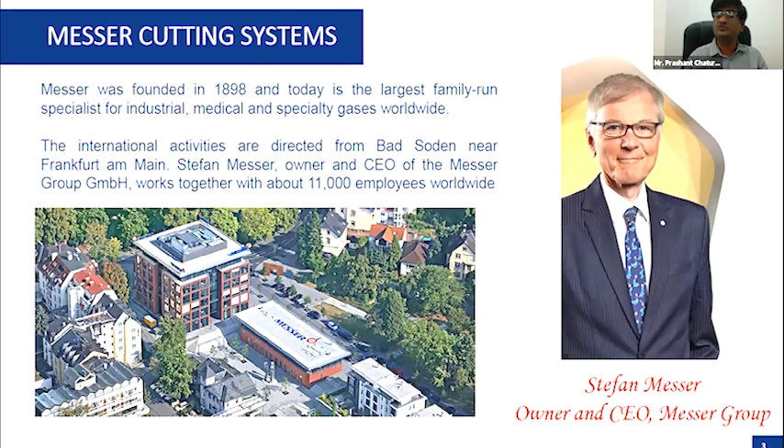So much of the business, almost 60% of the revenue of Messer Cutting Systems, comes from different industrial gases. They have different divisions, right from Spectron, which is a specialty gas equipment company, Messer Cutting Systems, which is primarily Oxy Fuel, plasma and laser cutting equipment, different medical gases, CO2 gases, and then there is a company called BIT, which is into instrumentation related to medical.

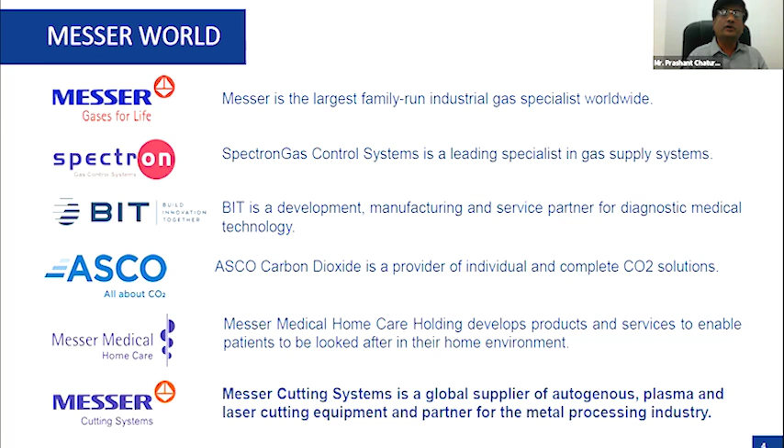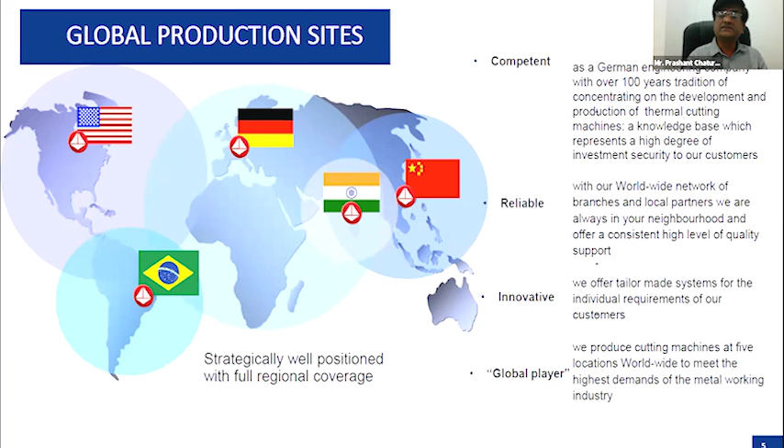So this is the bunch of the Messer world, and Messer Cutting Systems, which we are talking about today, is situated across the continents at 5 places. You can see on the screen that across the globe, Messer has its presence. These are the different strategically placed sales and service offices, again, across the globe.

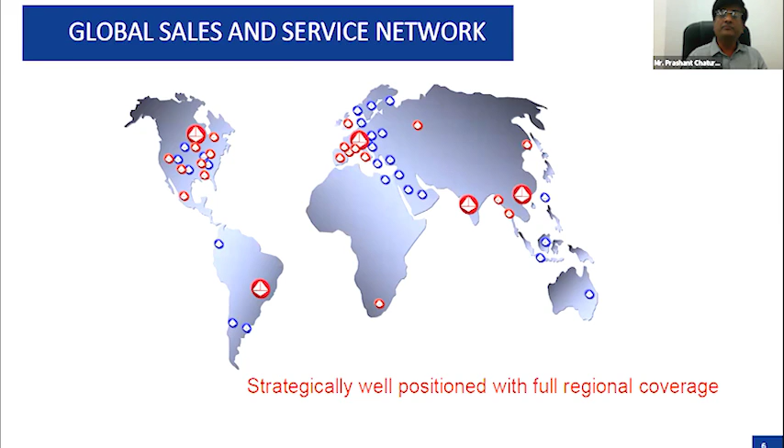If we take it to India, our plant is based at Coimbatore, and I request the fellow participants, whosoever are close, anytime you happen to be in Coimbatore, do visit. This is not a very huge plant, it's in some 5 acres of land, but it is one of the very beautiful plants from the Messer Cutting Systems family. So it's almost like a German plant, but inside India.

So I invite you, whenever you are in and around Coimbatore, do write to us and we would arrange a visit to our factory. Here we primarily manufacture the complete range of Oxy Fuel, plasma and laser machines. So as a company, when you talk of different processes, these 3 processes come under one roof, and Messer is the only company where the complete plate cutting solutions are under one umbrella. We'll just go through that quickly.

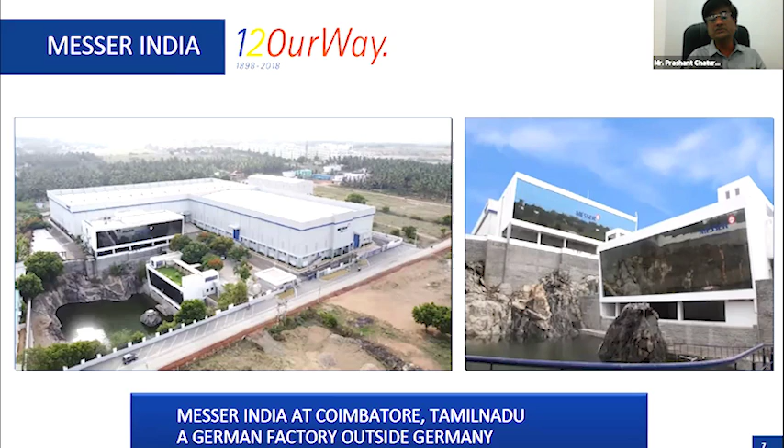What is the portfolio that we offer you as of now? What services are we giving in India? A quick glimpse: we are market leaders as far as the range of laser cutting machines.

And then we have a complete range of gas equipment. Actually, Messer's origin started with the development of the acetylene torch, which was invented almost 100 years ago. The gas equipment that we generally see includes cutting torches, regulators, flashback arresters, machine torches, and the range of equipment extends to the gas series, when we are talking of different industrial processes.

Safety associated with these gases is important, so we do a complete engineered gas supply system. Equipment imported from, maybe, China or somewhere, if you're not happy with them, they can be upgraded, and we can use...

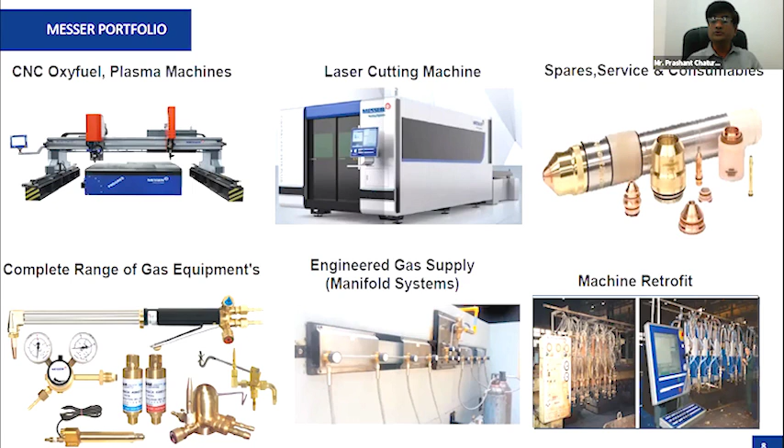In industry, when we call them thin sheets or foils, that is right from 0.1mm to 6mm. We generally term that into the family of sheets and foils. Then we see plates around in the factories, right? These are from 6mm to 50mm thickness. When they are there, we call them plates.

These are all under the family of flats. But when you go beyond 50mm, then generally these are thick plates, and when you go beyond 100mm, people start calling them slabs. So right from a 300mm slab to a very thin foil of 0.1mm, 0.2mm, engineering industry uses them all, and to use them, you need to cut them into various sizes and shapes.

Right, so we will be discussing the complete solution. I know I'm running out of time, so I will make a quick run through the presentation, and then you can visit our website, our YouTube channel, and our LinkedIn page, where there will be a whole lot of good videos that you can go through to understand the topics in length.

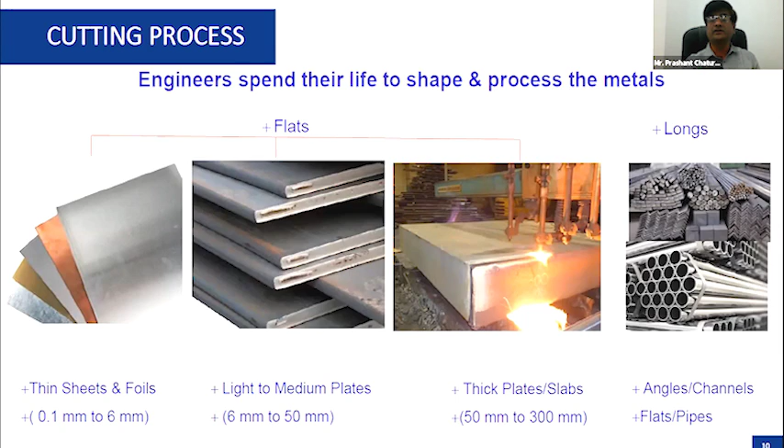So when we talk of mechanical processes, the basic router cutting processes are very accurate, and there is absolutely no heat, but the processes are costly as well as slow.

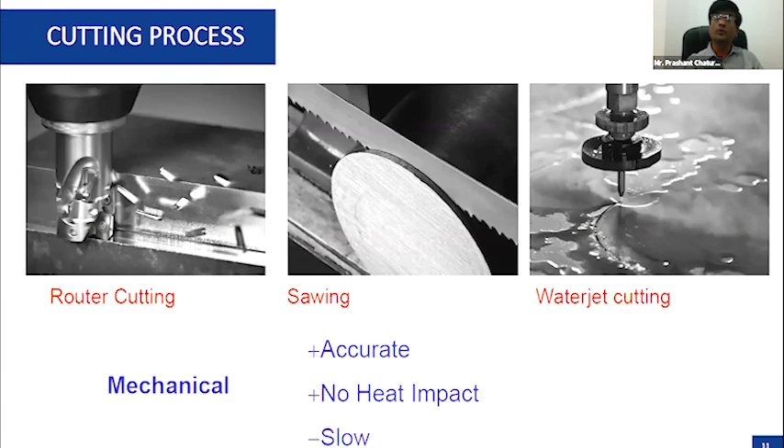When we talk of the three basic processes, Oxy Fuel cutting means we use oxygen and fuel gas. This fuel can be acetylene, LPG, or MAPP gas. Generally, these are the three fuel gases that we use. And then we have the famous plasma technology, where we use a plasma power source to use the heat of plasma as our cutting heat source.

The latest buzzword the whole industry talks of is laser cutting. In laser, our power source comes from a laser power source. When we talk of Oxy Fuel, plasma and laser, the earliest process was Oxy Fuel, then plasma, and laser came around. But none has totally replaced the other. All three processes equally exist in our engineering world and have their own space. That's the beauty of them, nothing has replaced it totally.

During welding, you need to prepare different types of joints. So while cutting, you can use beveling tools now and reduce your post-cut operations of preparing the weld joints. If the right tool is used, you can straight away cut the plate into a K, Y, or X joint, and a small finishing can give you a weld-ready plate.

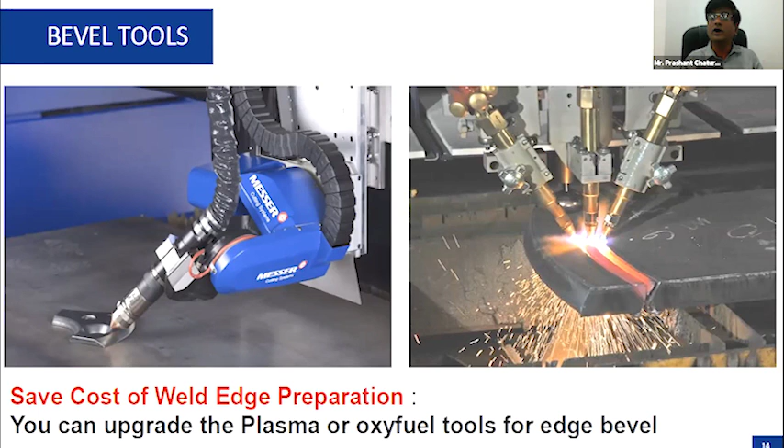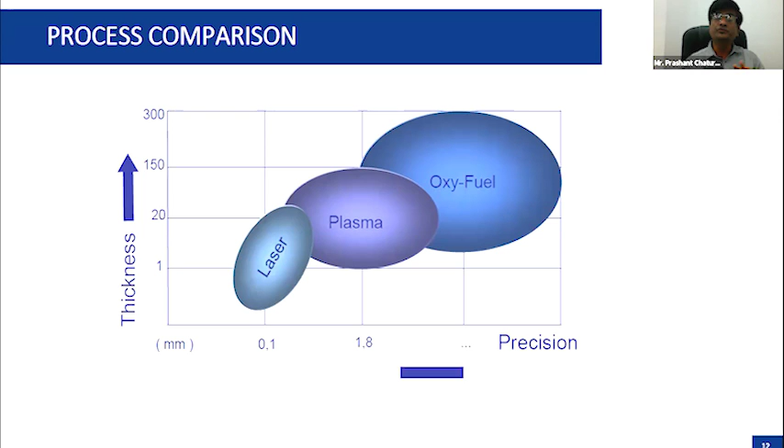People generally get confused about how to choose between the three processes. This is covered by a bubble diagram, which shows these three processes can be used in different ranges. When your precision increases, the process changes; when your thickness increases, the process changes. A bigger area, higher thickness, low precision is still covered by the Oxy Fuel process. There are also overlap areas where you can choose between two processes depending on conditions.

It's not that one process is faster than the other. At times you have to make a judgment looking at productivity, finish requirement, and the thickness you're going to cut. What plate, what metal, what thickness, and what finish requirement you need—all together decide which process you use. It's a very complex matrix in terms of selection of these processes.

Laser has the least running cost but a heavy investment. A laser cutting machine costs much higher, maybe 3 or 4 times an Oxy Fuel cutting machine. But Oxy Fuel requires continuous consumption of gases like acetylene or oxygen. Similarly, plasma can be the fastest process, but it also has consumables involved.

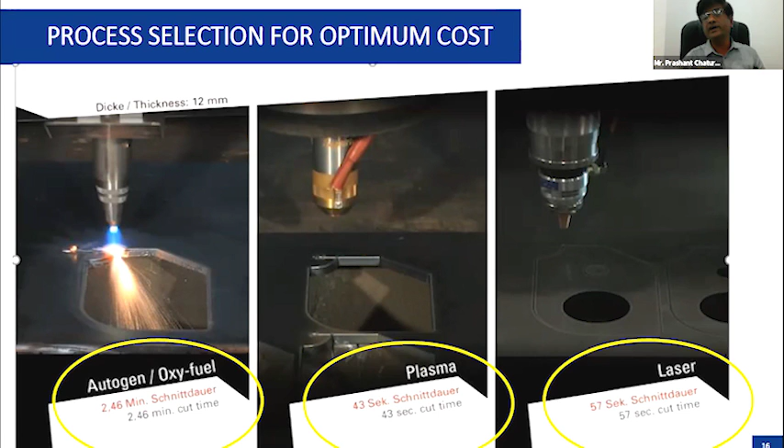You have to take a holistic approach in terms of application, where our team of application engineers can help you select the right process for your job requirement. That's the beauty of having all three processes under one roof—we give an open chart to our client and help them through the selection process for their particular application. If we only did laser, we'd pitch only for laser, but for us all three options are open. So our application department discusses with the customer and decides which looks to be the finest process in terms of quality and productivity requirements.

Oxy Fuel process—how much time do I have? Another 5 minutes? Yes, by 5:10 you can consider, you have another 5 minutes. Yeah, no problem.

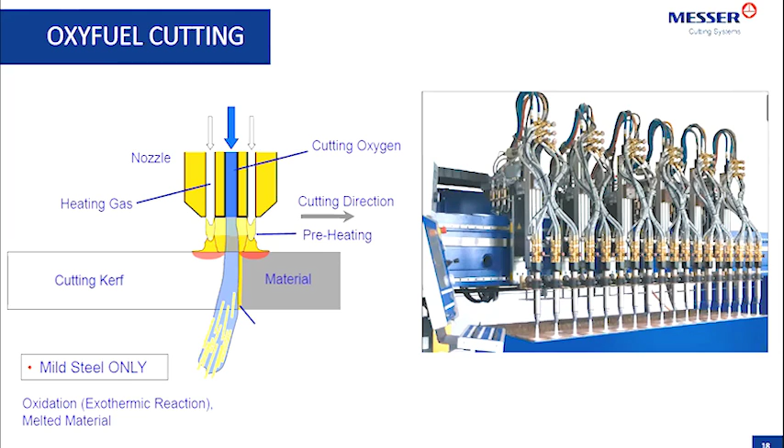Thank you, I'll try to give the gist of everything very quickly. I'm also joined by my colleague, Mr. Utkarsh Landekar, so if there are questions on applications, I have an application expert along with me that we'll take together. Now, the Oxy Fuel process cutting torch—into an industry, maybe a roadside welder also, or a cutter, you must have seen using a cutting torch, or a very high precision machine using an Oxy Fuel process.

The principle of the process remains the same. Generally we feel the flame has done the cutting, but the flame you see in an Oxy Fuel system is only for heating application. It's the cutting oxygen which actually does the cutting work. This cutting oxygen gives a high pressure stream of oxygen that oxidizes the surface, which melts, and by maneuvering your torch, you get a cut through the plate.

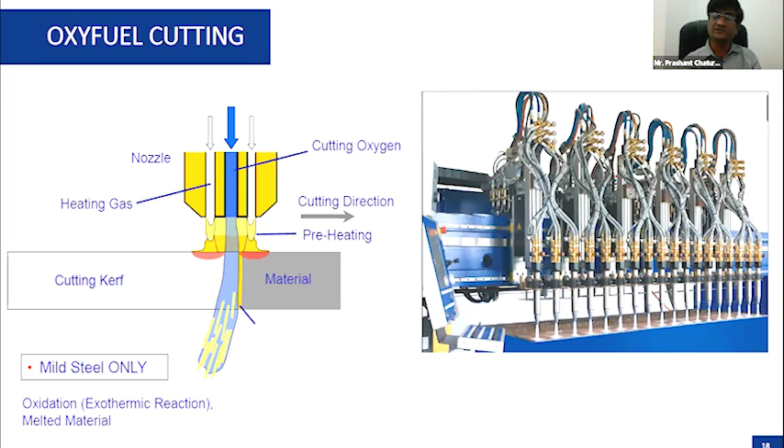Higher thicknesses are predominantly cut by the Oxy Fuel process. Within that, you select between acetylene and LPG, or LPG's other form BMCG, promoted by Bharat Petroleum. The higher the thickness, the longer flame you need, so you necessarily go with LPG or BMCG, which we term a slow burning gas. This is the principle of Oxy Fuel cutting.

In Oxy Fuel cutting, you have the lowest cutting cost per mm thickness, but at the same time you can operate up to 10 torches. You can use multiple torches on the same gantry, and your productivity can be enhanced. Up to 300 mm cutting can be done very well with this. The costs involved are electricity for running the machine and fuel—these are the two major costs.

And the consumables are very less and not much costly as far as the Oxy Fuel process is considered.

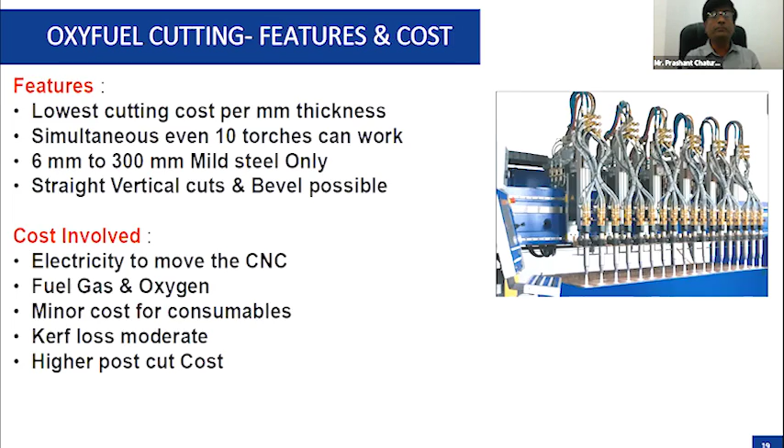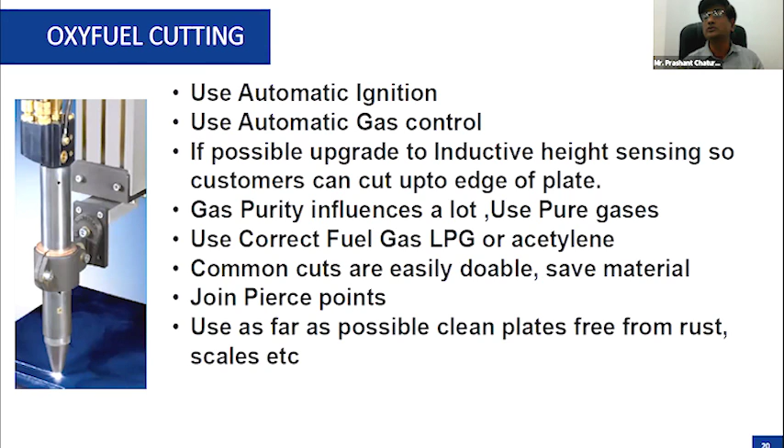When you go with the plasma process into Oxy Fuel, this torch that you see is a patented Messer torch. It has auto height sensing, and at the same time, it has auto ignition. The kerf width out of this torch is one of the most beautiful - this is what we call an Alpha torch. Sometimes the look is so beautiful that people mistake it for a plasma torch, but this is an Oxy Fuel self-igniting and auto height sensing torch.

Then you have the plasma process, which is the most common and predominantly used in cutting now. Much of the cutting sections are happening by plasma.

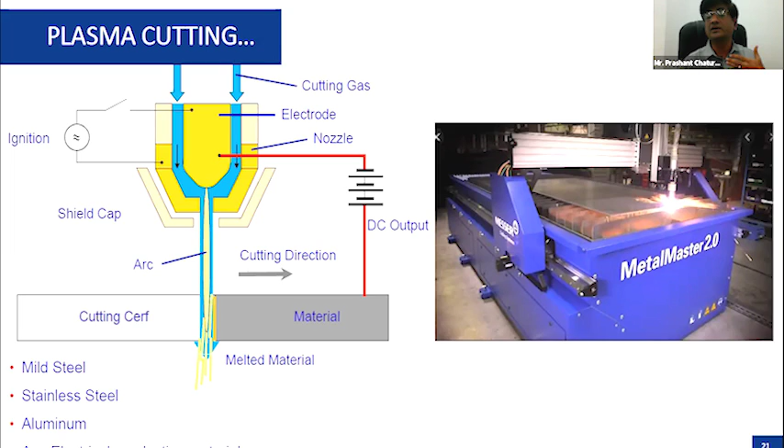Here you need a plasma source, which you create between an electrode and a nozzle. You create, by high voltage, an ionized gas between these two, which we call the plasma gas. This ionized gas forms a high stream of energy which you focus to get a plasma. But these nozzles and electrodes are consumables here - you have to select the right nozzle and consumable to give you the best quality of cut. But the cutting speeds can be much higher.

Now, similarly here, the cost is totally divided. The feature is low cutting cost per thickness, again between 6 mm to 32 mm. Then you can work 2 torches simultaneously, and up to 150 mm you can go very well with that.

In this also, there is oxygen cutting, oxygen plasma as we call it, and now a new series of high definition plasma. So there is a complete high definition series which is available.

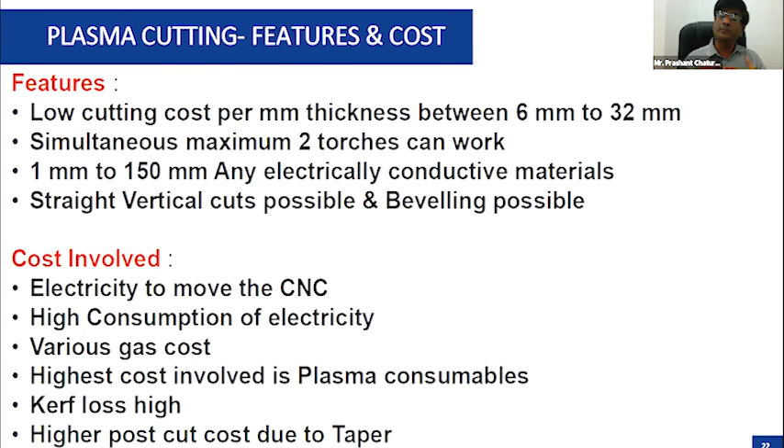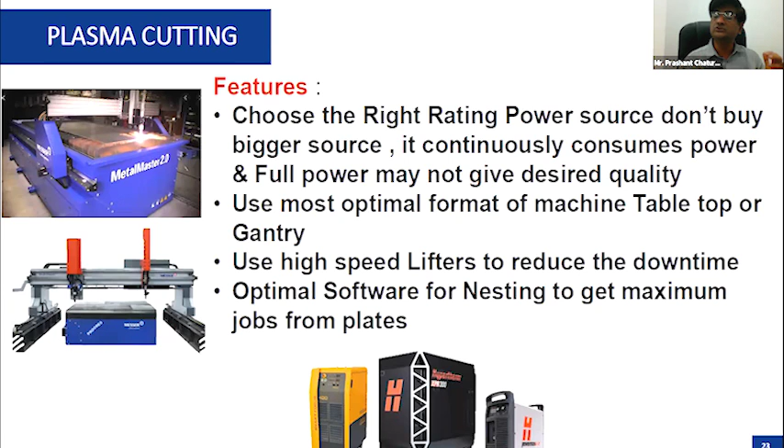As for laser, I would quickly run through this. You all know the laser principle - it's the same one we used to play with in our childhood, with one lens, going in the sun to burn a little piece of paper. That same principle, multiplied a thousand times, actually brings us the laser system.

So it has a laser power source. You use the light energy, focus it, almost to a pinpoint where it can cut through all metals, right? So these are hazardous things.

We have a complete range, right from the entry-level machine, to a complete encapsulated machine, generally categorized into kilowatts. Higher kilowatts are now available in industry. It starts from 0.5 kilowatt, but now generally people go with a 1 kilowatt machine, and the range can go up as high as 10 kilowatt very easily.

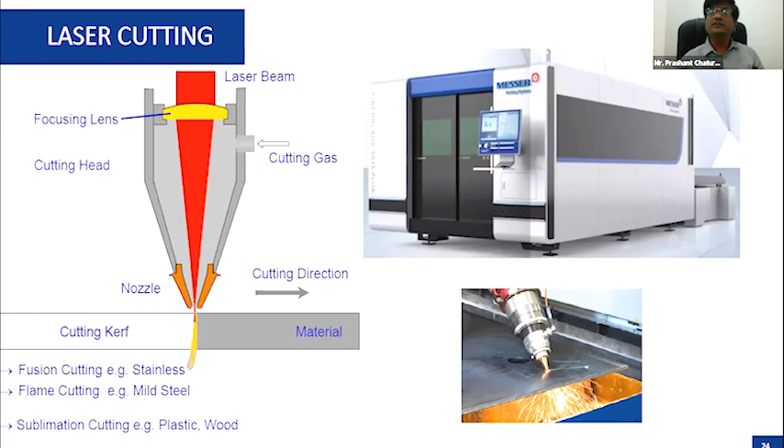I'm just running one or two slides more, and then I come to the end of the presentation. As my colleague Nimesh has already explained on the welding side, similarly, all these options are also available now.

ERP Connect, the software on the nesting, the software OmniWin - you can even capture complete information about how your machine was running, how much time the arc was actually on the machine, in terms of how much time the plasma arc was running. So what was the idle time of the machine, how much cutting it has done - complete data is available. It's completely IoT enabled, and you can go for these options where you can remotely, even on your mobile, keep checking how your cutting work is being done in your industry, in your factory, in your plant.

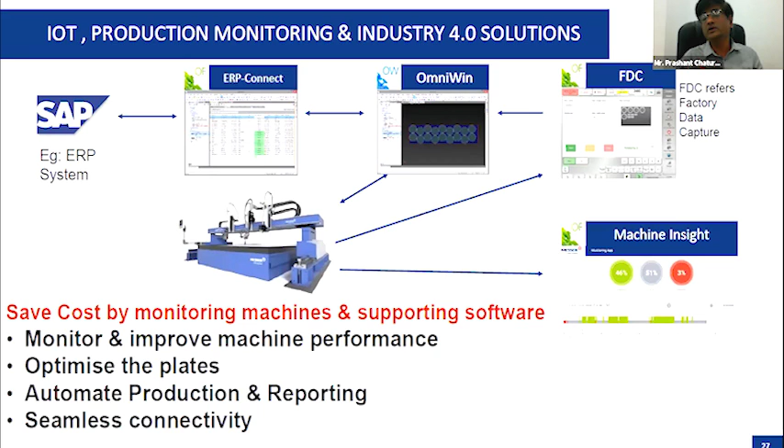We already have 2 installations of this. These are on the higher side, higher capital intensive machines. Already 2 machines are established, primarily for railway.